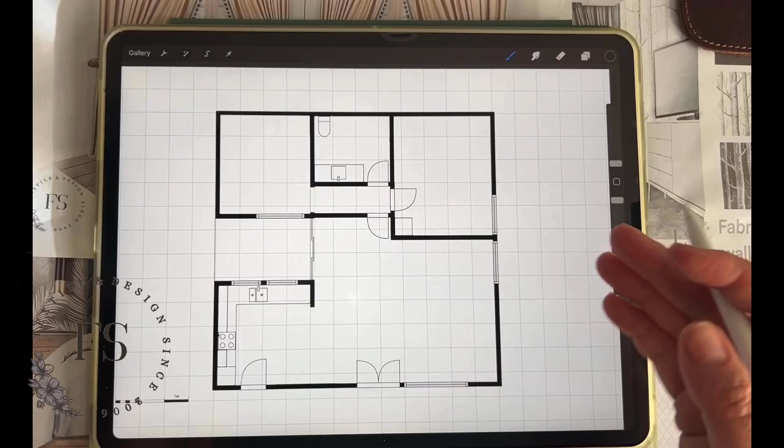Hello everyone! I'd like to show you a 2D floor plan drafting set for Procreate.

This set is highly compatible with CAD programs like AutoCAD, allowing you to make edits directly in Procreate and achieve maximum alignment with the original floor plan lines.

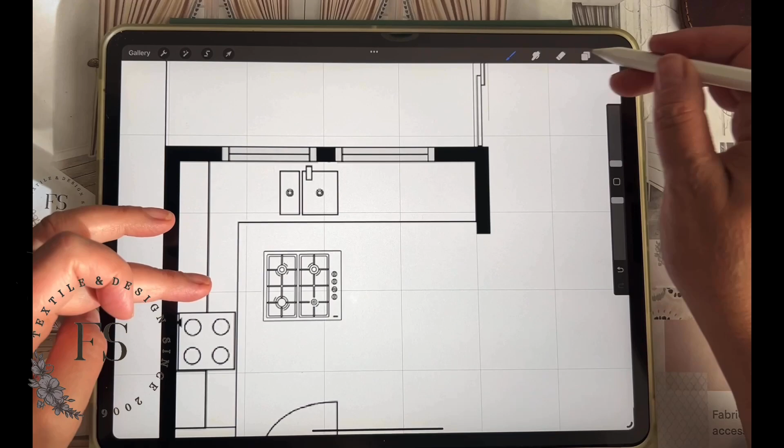The set includes a variety of interior elements. For example, I can select the gas stove brush and place it in the kitchen area of the plan. The lines are thin and closely resemble those in AutoCAD. To make the item more noticeable, I duplicate and merge the layers, allowing for easy placement on the plan.

The set also includes six door brushes with different opening directions.

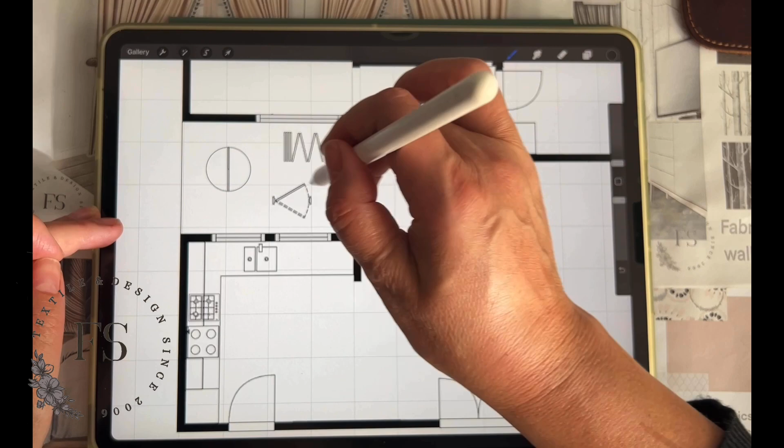There are bathroom items like showers, bathtubs, sinks, and toilets.

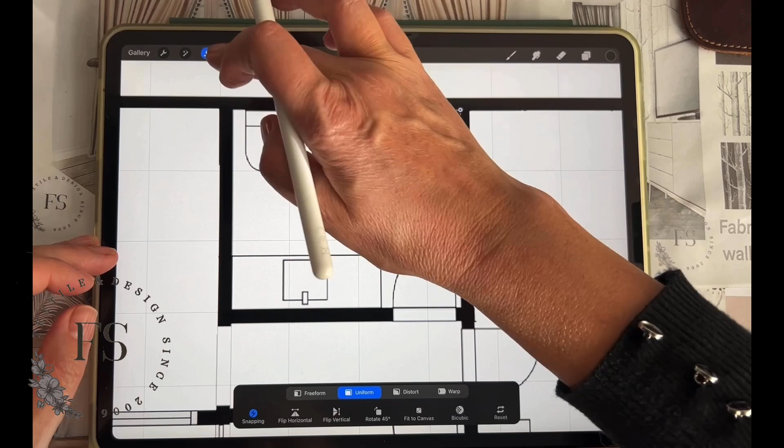Decor elements and personal items bring life to the project, including several table settings, flower arrangements, pizza, and more.

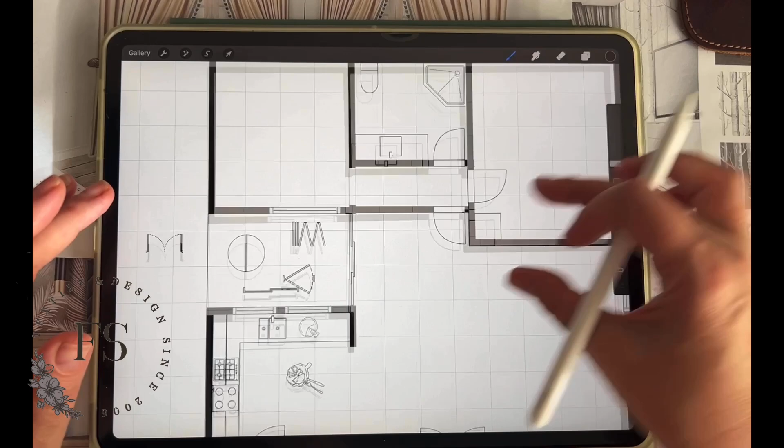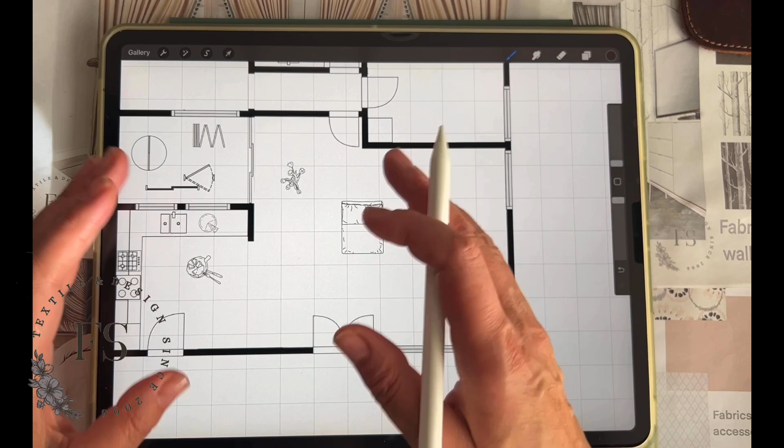Separate sofa elements act as a modular system, allowing you to create any sofa size and design, whether straight or corner.

Rugs in various shapes and sizes are also included. For instance, a rug that looks like an animal hide.

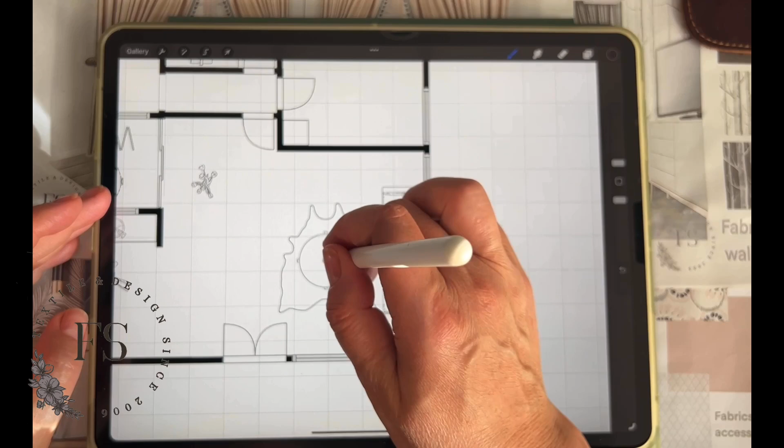Additionally, the set has tables, floor lamps, animals, cabinets with open and closed doors, children's bikes, and terrace items.

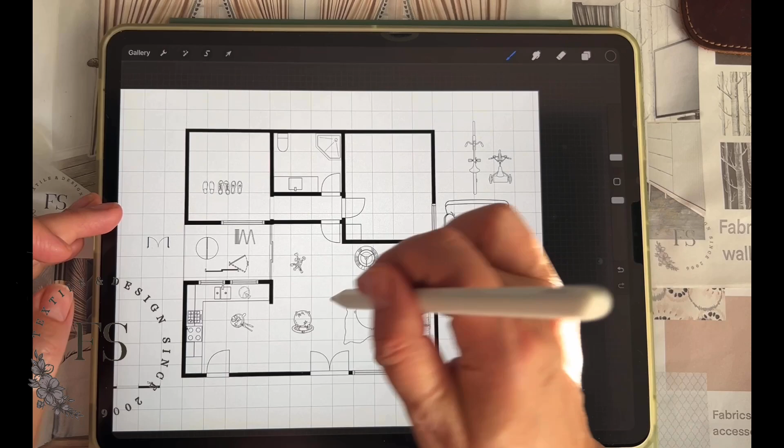Beyond interior items, there is also a wall brush.

It's best to use it with the drawing grid active, and you can save specific brush sizes that you use most often or that fit a specific plan. I have saved the brushes of preferred sizes, making it easy to avoid adjusting the brush every time.

There are also two hidden floor radiator brushes.

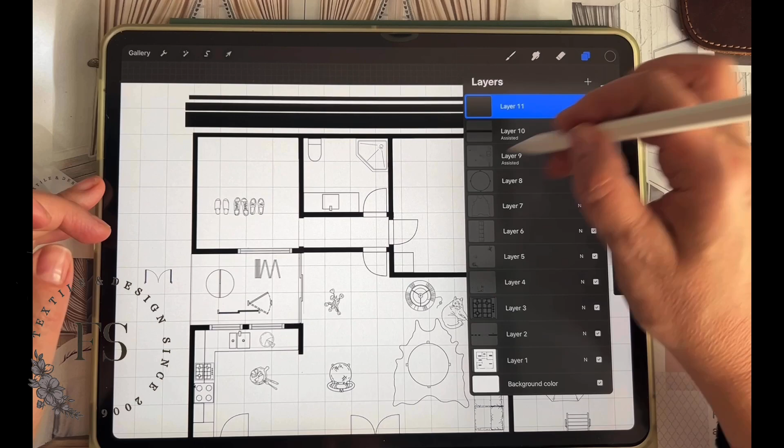Apart from that, there are curtains in a top-down view. To draw curtains from above, use the drawing grid and hold the stylus at the end of the line to smoothen the edge. Any extra lines can be trimmed or erased with the eraser tool.

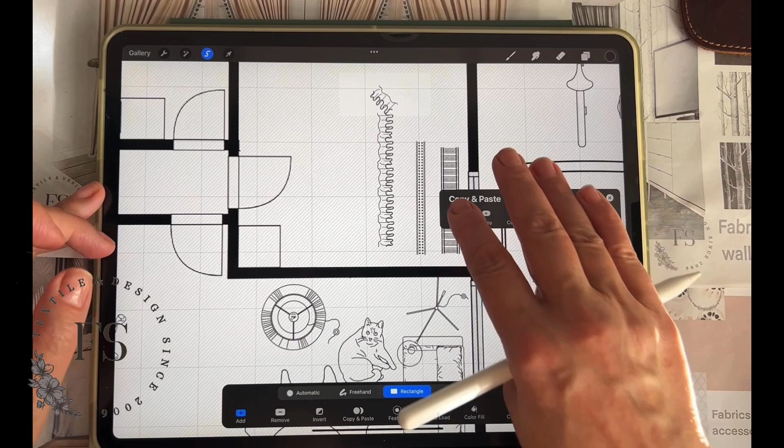There are two brushes for open radiator.

There is also a north direction symbol and an arrow for entrance.

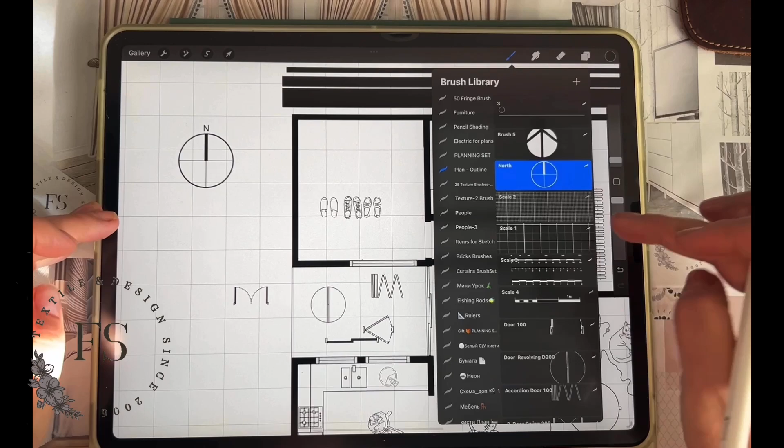The staircase brush can also be used as a marker. Draw a line, hold the stylus at the end of it, then stretch it to create equal spaces between rectangles.

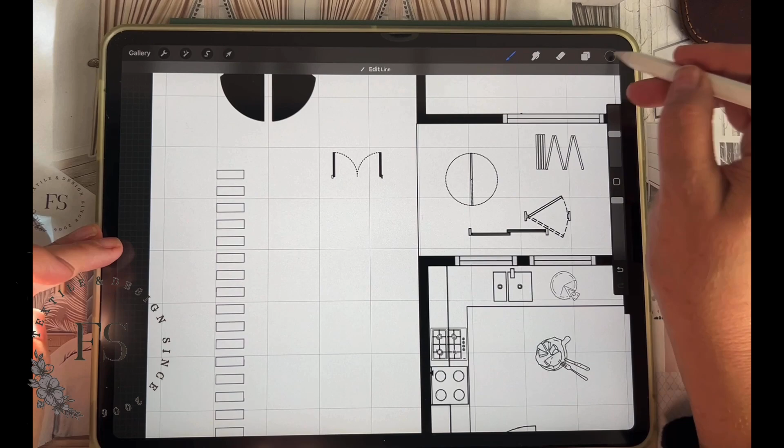You can fill this with color or add paint codes for walls. The set includes several brushes for project detailing, which you can customize as needed.

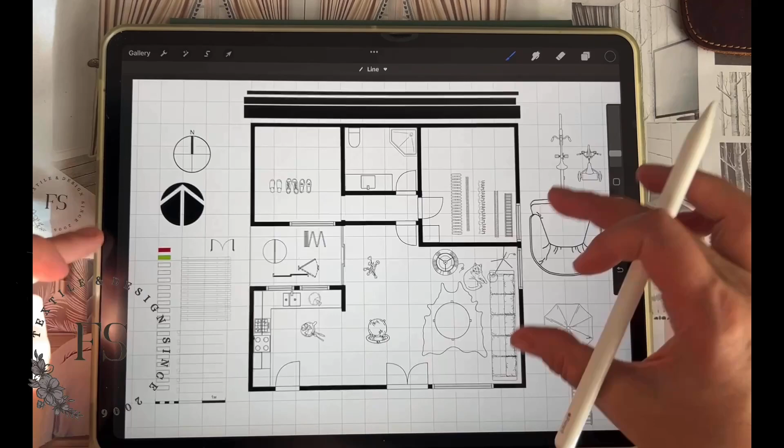The set also includes various scale rulers. You will find rulers suitable for both outdoor spaces and interiors, which you can crop and adjust to fit the needed scale.

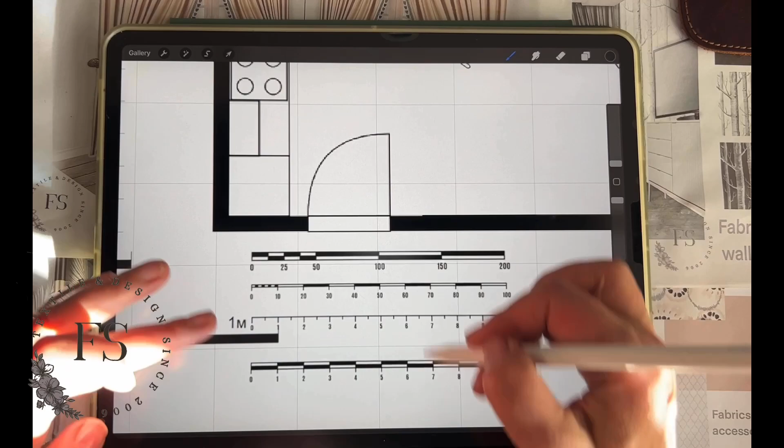There is also a graph paper brush. Set the brush size to minimum. Then, while holding the stylus, apply the grid to the canvas.

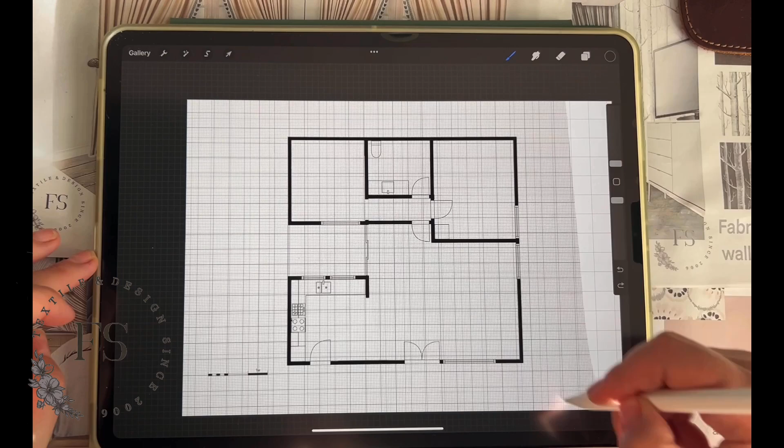Next, open the settings and enable the 2D grid. Set the grid size to 10 mm. Use the blue point to align the Procreate grid with the drawn grid. Each square will now represent 1 cm.

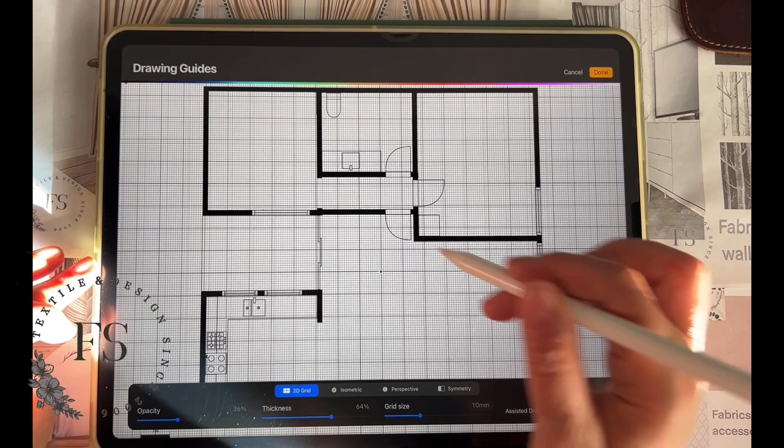If your plan is set in meters, each square will represent 1 meter. After setting it up, it's easier to add interior elements and draw walls accurately. For example, a bathtub measuring 2 m by 90 cm can be adjusted to fit the scale on this grid.

The second ruler brush is similar, but each square is divided into 4 cells, providing a larger scale option.

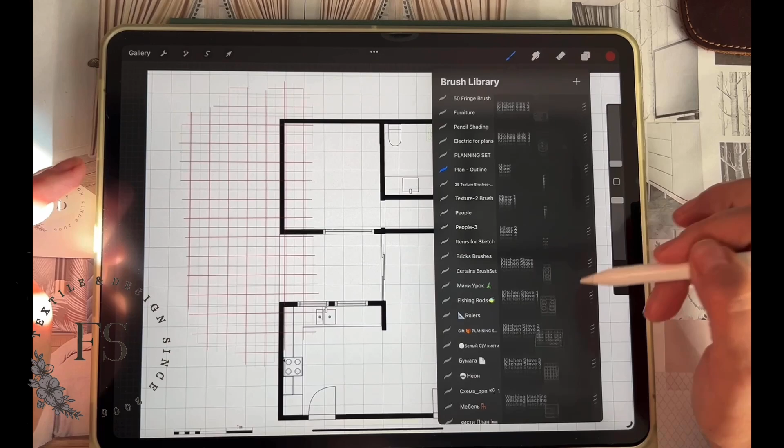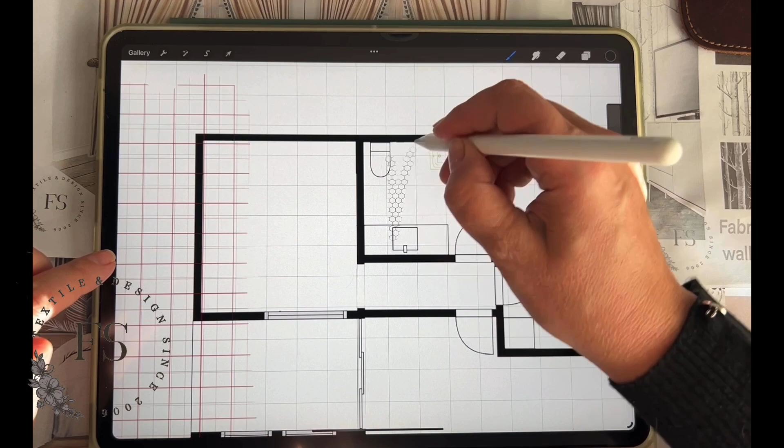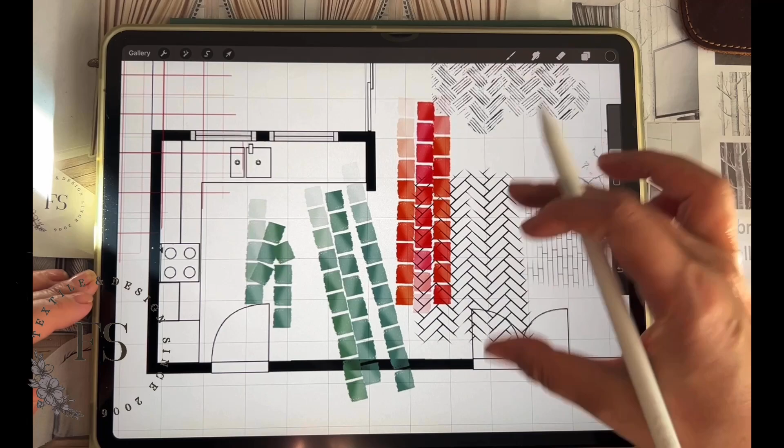I've also included 25 textured brushes in this set, for example, parquet, marble, wood flooring, subway tile, mosaic which is a color brush, wood slices, and logs for outdoor areas. These brushes are among the most commonly used ones in different projects.